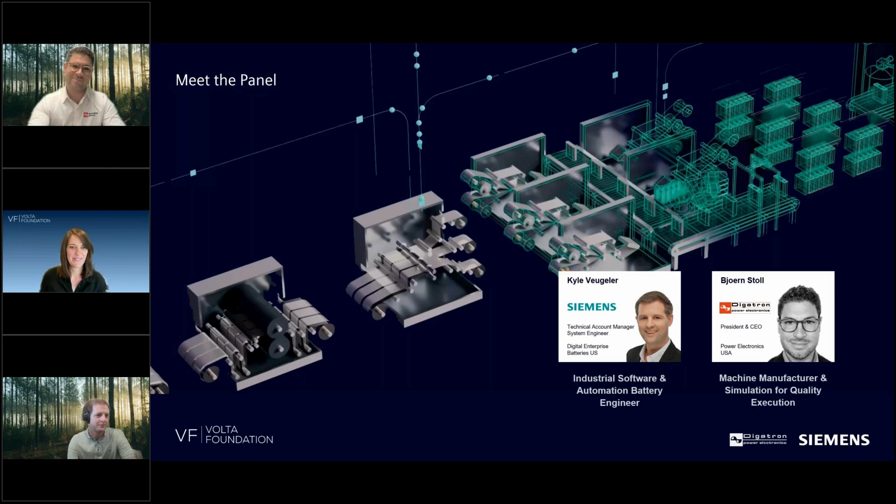Myra essentially came to us in both Digatron and Siemens and wanted to put something forward to the industry in terms of digital twin, some of the R&D design decisions that are coming out of lab environments, universities, academia, but how are we taking some of those findings using digital twin to actually go through that Death Valley gap of going into production, into basically turning a coin cell into an actual cell for production for people to use within industry.

Some of the key takeaways that we've identified, both myself and Bjorn, were what can we do to use some of these tools, or the questions people are asking for accelerating manufacturing ramp up, for the design and production synergy. I want to make a call out here in terms of some of those design decisions become exponential downstream to many different stakeholders. Thirdly, I would say the global partnership for production scaling, where Digatron's really going to speak

to what they do with manufacturers, tool builders, system integrators, looking for some of the solutions. And then also enhancing market readiness in terms of what we're using on those digital twin systems, how to improve, iterate, and better the next variant of those tools. Okay.

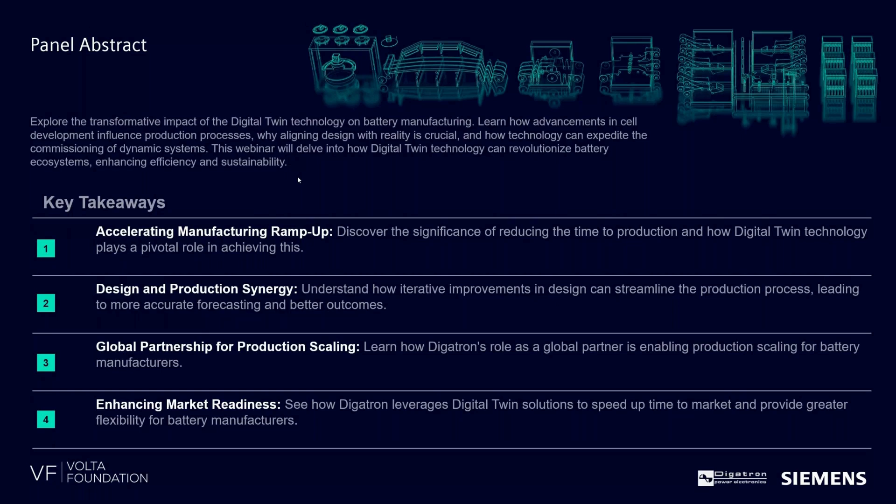So firstly, I want to explain my role within Siemens as a technical account manager. I tend to be a guide in some cases. Sometimes it feels like cheating. I've done a lot of these problems over and over and over again for the last 5 years at Tesla and others. But a lot of these customers are really starting to understand the value of digital twins.

And every battery manufacturer, tool builder, system integrator is at a different point in their life cycle of defining the problem, solving the problem, and then expanding that problem solution set. I want to give the industry at large here on the call today an idea of what I'm seeing, regardless of customer, form factor, chemistry, whatever that might be, what we're asking ourselves and how we're helping solve some of those solutions.

So firstly, a lot of the simulation of old from aerospace and automotive, it really becomes what are the limiting factors or front-end engineering simulation tools to define some of those key metrics. We do this in academia, we do that in research and development. We do this to define what is it we're trying to achieve on a simulation basis.

Also, the one that really has been a foothold of the last decade has been, how do I calculate my orchestrated operations? If I need to do 5 gigawatt or 10 gigawatt, how many tools do I need? Do they orchestrate well together? Is there a need for a buffer system? What's my consumption rate? That has been a simulation tool many years that we've been using within industry.

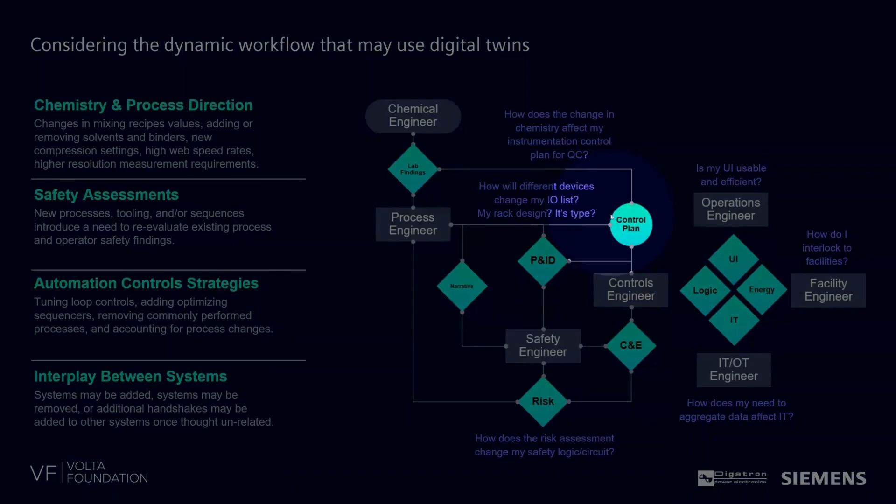I want to give an example of how that becomes a problem at scale. So say you're in the research and development team and you're looking to do something as simple as changing from NMC 811 to NMC 955. You're not going from NMC to LFP, you're not going from pouch to prismatic, you're not doing a vanadium battery change from a lithium ion, you're just changing the recipe within your dosing.

But downstream, you start to see drastic effects as it goes down to the different organizations, and it becomes exponential in nature. And I'll explain why the simulation tools and how they're interconnected help bridge that gap.

So in NMC world, you're going to change something like the amount of kgs of your binder, active materials. Those will have different physical properties, and they will have possibly different means by which you can measure bimodal distribution or compression or thickness of your electrode. Everything will change based on just changing something like this. And you're changing that for that reason, to actually have a better battery.

Now, what those teams in the R&D team are doing is they are trying to solve for these key quality gates, as it were. Like, we want to have a defined particle size or a different modal distribution or a viscosity or a granularity test for dispersion. They're defining based off this, those will change.

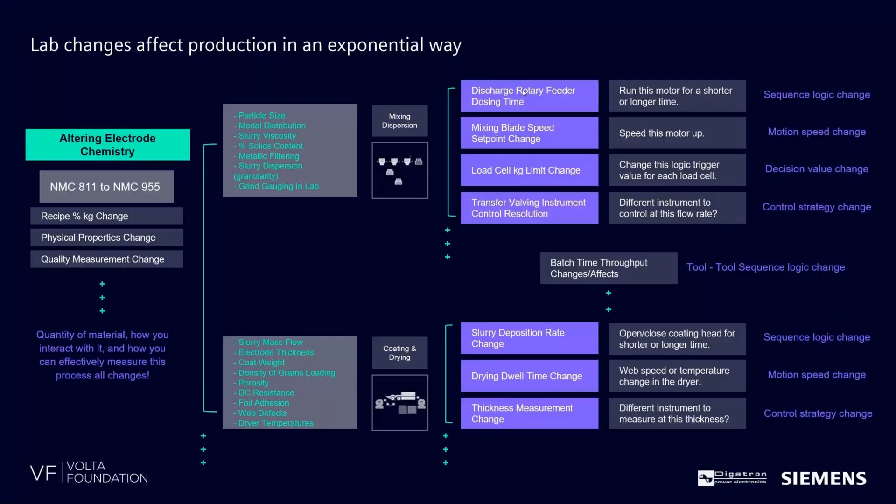The goal here, I hope the team starts to take away, is that a small decision, asterisk on small here, from NMC, just the dosing recipe or the chemistry, massively affects people downstream. Now, how do we tend to see this play out when it comes to industry?

There's three main hallmarks when you're tending to approach this problem. Your organization might not have the stomach to digest how big your appetite might be, but more or less this holds true. The beginning stages of defining what is your chemistry, what is your process, those teams are looking to solve for what are the key parameters for quality. What are the things that I need to attain in a coin cell that I need to take out of a lab into mass production?

The second wave tends to come with defining your process. Simulation tools here tend to be focused less on what are the key parameters to build, but more so how do I define the process by which I can do this at an industrial level, at scale, at a repeatable, resilient level. Within Siemens, we have aspects like CFD modeling or full-blown front-end engineering, multi-day, multi-hour simulation tools to define this, from atomic all the way up to CFD modeling.

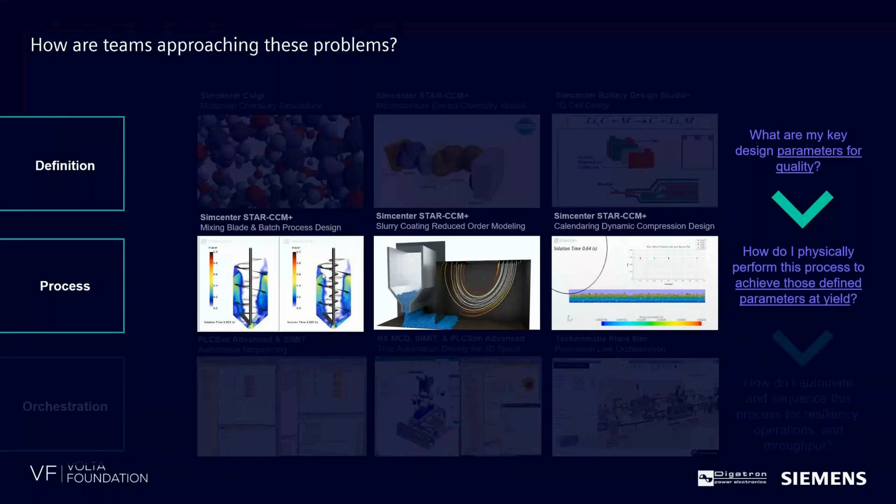Now, this is an art form, to say the least, but what we're starting to see in battery today is the tie points of that front-end engineering into the actual automation and how we can play with that interlock system.

We're seeing a mass adoption here in terms of simulating the automation and the manufacturing tools together. So when it comes to orchestration, you may want to simulate something like the PLC to validate the startup or shutdown sequence, a safety event, an e-stop event. This becomes far more important when it comes to battery and some of these continuous processes.

The analogy or use case I tend to show people: when we design safety for these tools, let's say it's a compression system, and I have a large calender. When you have an e-stop programmed into that system, A, they take hours to start up and shut down, but B, the e-stop is meant to protect your operators, or possibly the process in that case. There may be a hidden ramification for that e-stop.

Say you hit that e-stop, yes, you protect an operator from being crushed, pinched, whatever that might be, but it might come with a $100,000 price tag to resurface your calender facing over in Switzerland, or something to that effect. Being able to simulate, A, how does this tool individually, startup, shutdown, safety, how does it work itself together is important. But especially when you go to the gigafactory scale, how does my mixer dose into my compression system?

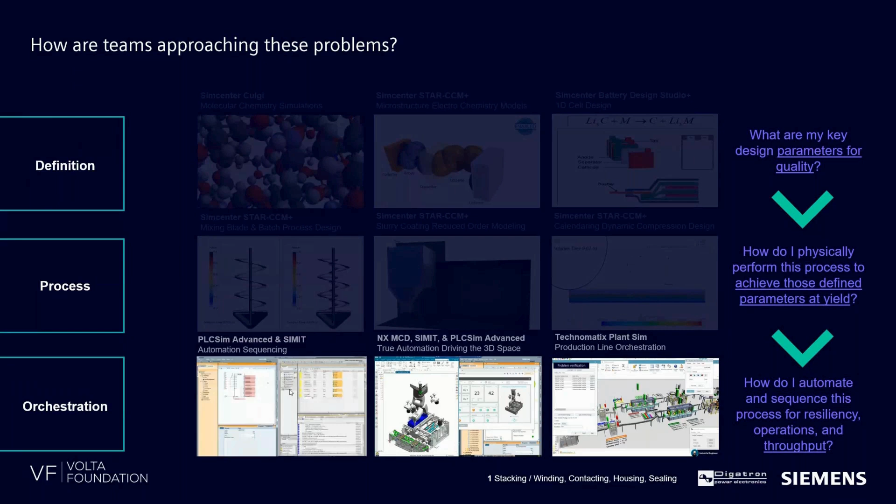How do my compression system and my coating system feed into my slitters? When I have these different tools, how do I work them together? This is what we're starting to see a lot of adoption in the industry in terms of validating this today. Hallmark here, like I said, there's front-end simulation tools for defining what your quality is and how you build your cell. 2 is the process by which you do that at a scale. And 3 is defining what your throughput is and how does it all work together.

So you're looking at quality first and foremost. Second, yield. If you're going to be selling batteries and you have 10% yield, you're going to go out of business. 3, throughput. You're a battery company. You might as well have a good throughput in terms of producing cells that you're looking to achieve.

Now, I want to give an example of some of this proactive validation that we're seeing across the battery side of things. This is an example of tying those simulations from a top-down approach towards the production line. So in this case, this is showing that play and how they somewhat overlap and can feed back into each other to characterize maybe I need a twin blade mixer, or maybe I need a different 40-ton compression on this electrode film because I have a different ratio up here.

In this case, you might change your recipe. You might have a higher compression percentage that's required. You need to validate if I add Si, or silicon, if I want to go down this road altering the more modern anode side of things, getting into material properties like Young's modulus and looking at thermal conductivity. This tends to live in this world up here. But you're still solving for something that these need to achieve.

So if you take nothing away from today, there are many different digital twins and simulations available to you. Not everything is one size fits all, because you do need massive data modeling to do atomic structure simulation, where you don't need to do that for other applications. But those key parameters that you're defining up here are what this is achieving. So this is where we link them all together at Siemens today. You're analyzing, you're finding these parameters. This is that Goldilocks zone of this team interfacing with the other teams.

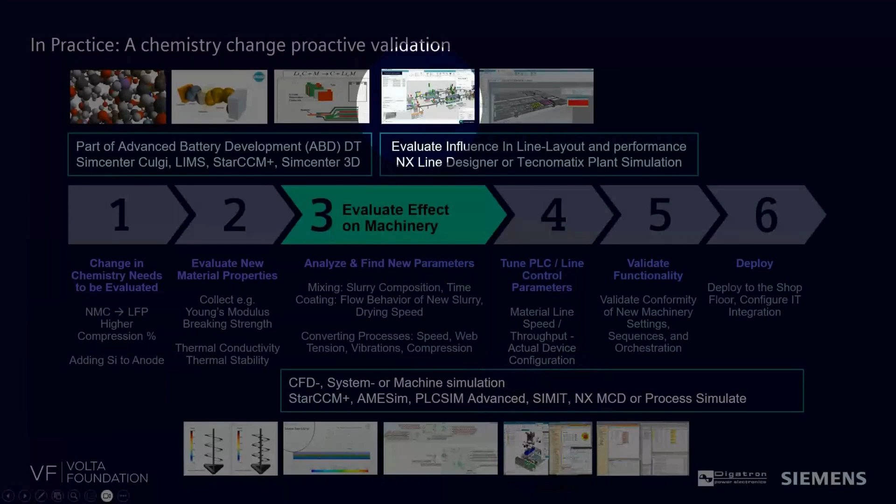Now I want to give you two, we'll call it thought practices in terms of how I'm seeing this play out as well. The first one is a top-down simulation approach. This is more of an early days critical path. I have Sequoia funding. I need to get C-Series out the door. I need to start getting some ROI on my business. Those organizations have a really good understanding of what it is they're trying to achieve for the parameters set.

That's great. In most cases, you're starting to see, I have an idea of what my line needs to be, how I should size it, how many lines, but they're black boxes. And then they look out to tooling suppliers to say, hey, solve this one box of the 20 boxes according to my parameters. And then as that process plays out, you start to understand, I have no idea maybe how that machine works at the fine-tune level. I have a general idea of this tool.

I have a really good understanding because maybe I have a novel process on how I coat or how I do a certain process in the system. But you're starting to get a general idea of how those work together. And this is really where the problem of simulation tends not to take too much of a hold here. The modern advancements of the last 4 years of our communication speed and compute capability allow us to go to this bottom-up approach as well.

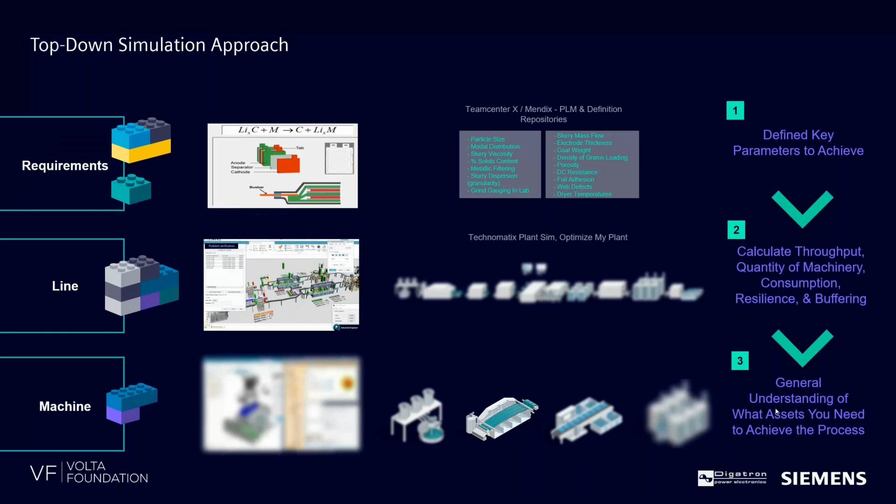So you can still start with the top-down, rough it all out into these different chunks that you can solve and move forward with. But now that we have the ability to take the PLC data and the actual automation quality parameters, we can start to push that back up into that production line model instead of, I have an 80 meter a minute metric for my coating line. No, I want to tell you the exact speed ported from the servo drive on my coating roller journal, my main drive line. We're bringing those into the line simulation to say, sure, you can simulate it. We can now take it and characterize that based on real world characterizations and observations.

And what you're starting to see is you can actually go through and figure out bandwidths or phases or gates that you can see on the different particle sizes. If I go past this threshold, I really need to radically change my production line or my manufacturing tooling provider because of this. That is incredibly important for the team to hopefully take away here.

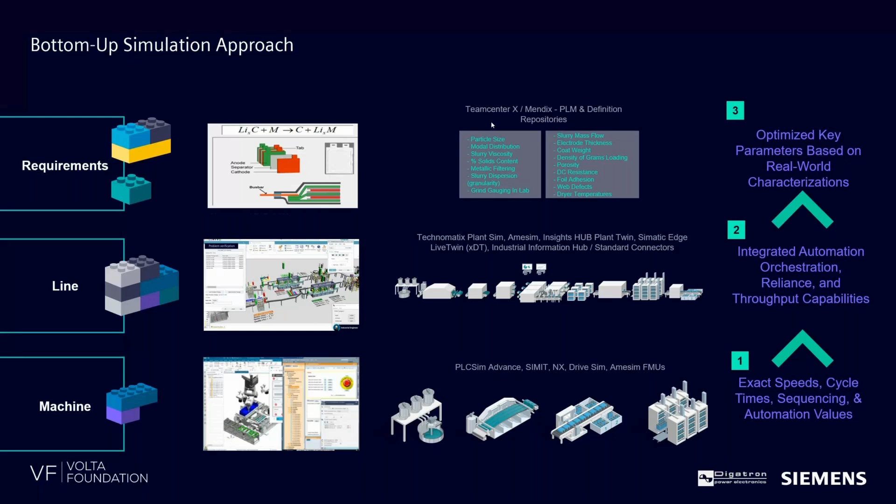This here is kind of an overview of what I depicted earlier. It's really more an aspect of, I want to make sure people understand there's definitely a time and a place to understand what is my simulation in the early days for understanding the atomic structure of my cell, maybe a smaller market, more niche. There is an OEM tool builder system integrator suite in terms of understanding how should I design this specific tool or optimize it or iterate upon that.

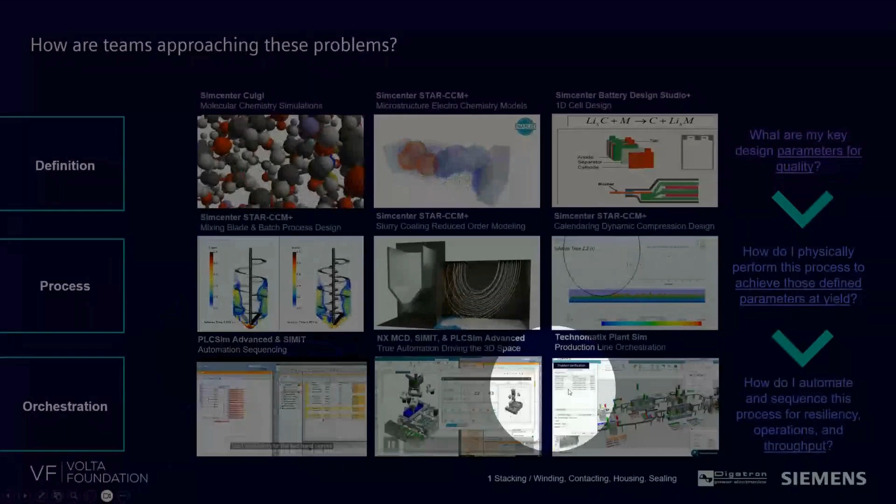And then also lastly, there is a massive push for creating digital twins to validate sequences. Me personally, I did not want to go do a factory acceptance test over in Korea or over in Switzerland, wherever that might be. If I can virtually take a look at this program, validate it is correct for what I need, I'm not going to go over to a supplier, yell at them for color codes and naming conventions on the automation. I'm going to use my time well.

Second to that, operations for battery. All of you are very familiar with this. We tend not to want to start and shut down these production lines. So training your operator and your workforce in a virtual environment that doesn't have a ramification for an e-stop or a plugging of a loss-in-weight feeder, wherever that might be, really de-risks your operations and training and your iterative design for the future.

Lastly, what I'll say with this is more of a US topic. I'm seeing a lot of manufacturers. Maybe you're a tool builder and you source to Georgia Pacific in the converting industry, or you do food and beverage boxing like a Tetra Pak or others. They know web handling and coating quite well, honestly. They're looking to say, hey, what if I just throw electrode into this instead of pulp and paper?

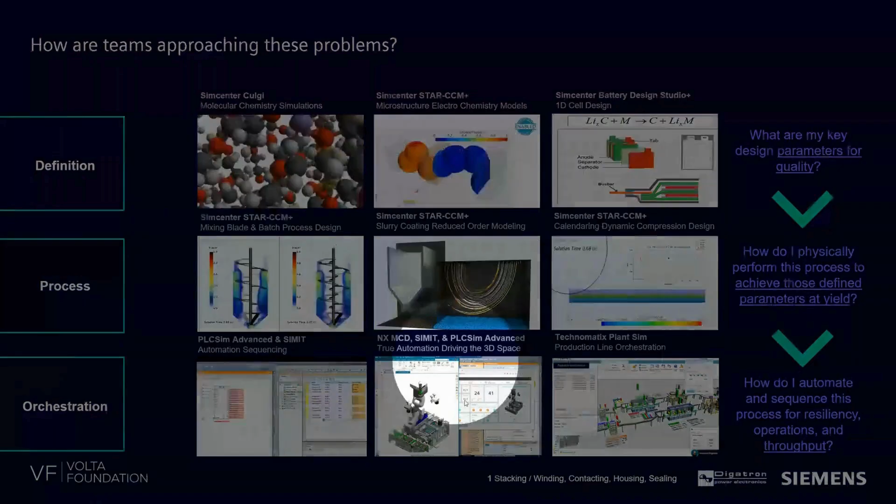The digital twin allows them to create their tool, validate some of those metrics in place of saying, I want to buy a $3 million CAPEX, build the tool, then figure out if I can do this and sell it to someone. This is one of the unlocking aspects of tool builders within the US today to say, can I move from that industry over? I don't want to bring lithium into my building.

I don't want to spend $9 million on a formation, aging, and test structure and float $9 million for a year long. I want to create this, show it to my potential customers, and I've already done 30-40% of the design work for when they give me a PO to move forward with this. So it's really helping deleverage industry adoption into battery as well, which has been really helpful in the US.

Okay. Aside from that, I wanted to paint the ecosystem as I'm seeing it across manufacturers, OEM tool builders, and system integrators. Now that we can understand at least the ecosystem of what people are asking and the take rate for things, I really want to hand this off to Bjorn, who can speak to what they've been doing at Digatron in terms of the tool design and using some of the digital twin aspects.

Bjorn, it's all you. Thank you very much, Kyle, for handing it over to me. As we discussed at the beginning when we prepared our presentation, my focus in my previous role was using Industry 4.0, IoT, Internet of Things, digital twins more on how we can increase productivity. This has changed after not only our conversation, but also in the market, talking to our customers. And the major topic and the major focus is safety, risk management, and quality.

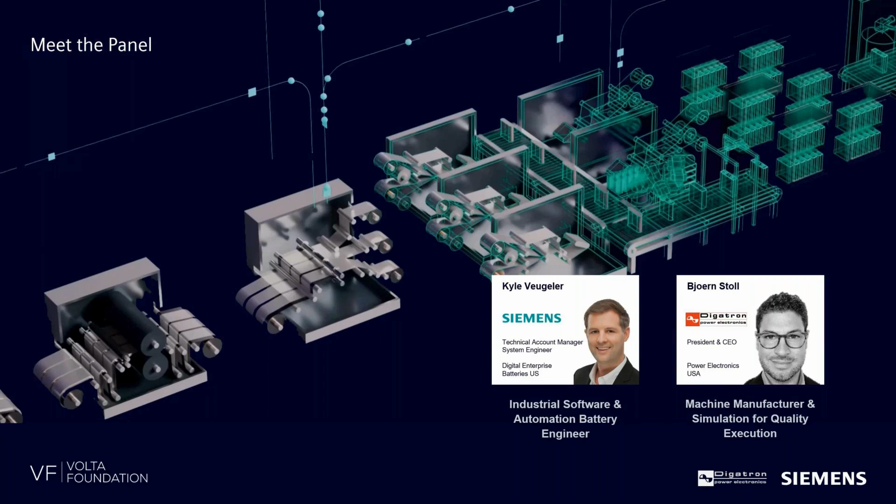Risk management on the financial side, on the downtime side, and that includes also what you have presented on the change side. But as a manufacturer of machines, we are focusing on the development side before we are building the machines. So if you go to the next slide, please, we have an example of how we are doing it at Digatron. For example, over here on a pouch cell. So we are starting the dry side. That means that we're starting on the anode and cathode cutting side.

Previous topics which Kyle presented, mixing, changing chemistry, are impacting us later on. And that's the reason why a digital twin can help us in the entire planning phase where we need to focus on safety, quality, and risk management. Hence, we are starting with single station units on cutting, and then we go through the entire process flow. This is only for pouch. We have the same for prismatic and for cylindrical cells.

And while we are having single station units for every process step, it helps us and the customer to really see in the development phase where they need to have automation, where they need to increase their safety aspects, where they need to change something before they're making the investment. And that's the reason why I'm talking about risk management from the beginning, to avoid investments which they are later not able to use or need to change when the customer has installed the units in the factory or in the development lab.

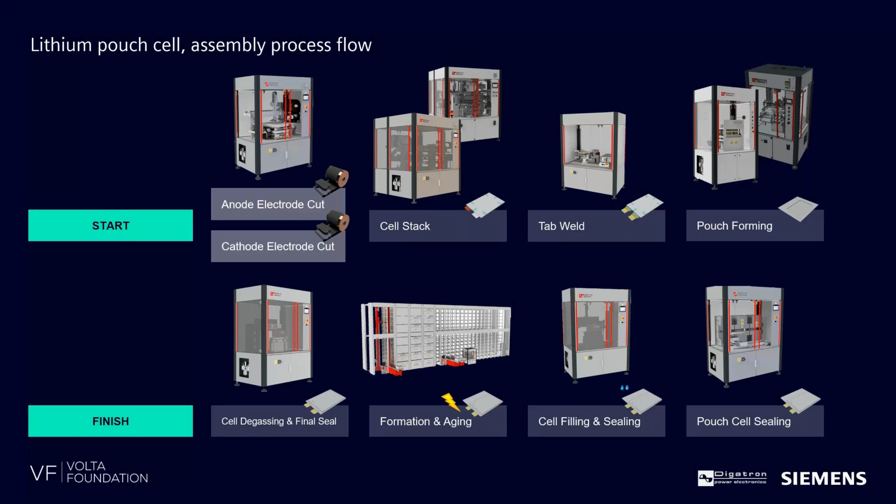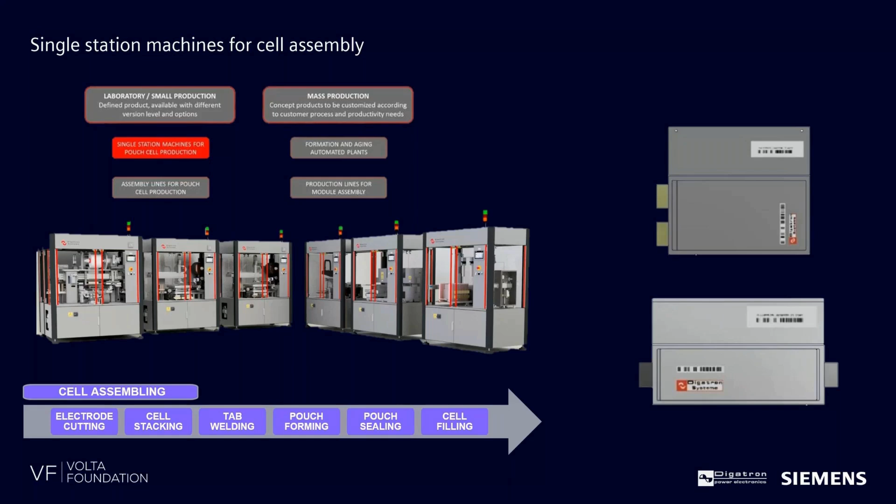So hence, we are going to the next slide, please, Kyle. We have the single station units on the lab side. Later on, we are going into mass production, and that's the reason why the digital twin can also increase the amount of cells you're producing every day. So you can scale it up, and you can see where in the process an automation makes sense, where you need to have quality inspection in place in the process, as well as where you need to increase the amount of machines to achieve your manufacturing output and quality you have promised to your end customer.

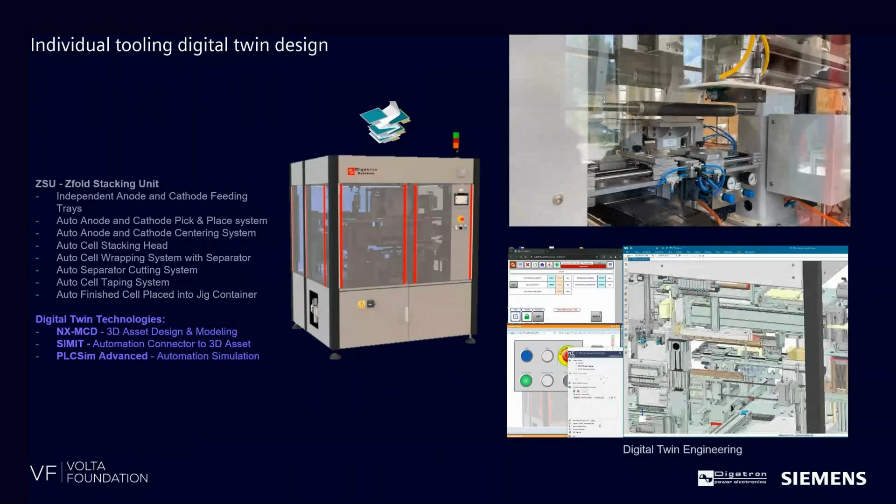So for example, we have over here a Z-folding stacking unit where we have a digital twin on the right side below, where we started to simulate the entire Z-folding process above. So you can see below the digital twin is showcasing exactly what the machine at the end is doing when we have installed it at the customer side. And we are using the simulation for all machines along the entire process flow, which I have shown in the slides before. And we are analyzing where we need to increase speed or reduce speed, to have the quality parameters fulfilled for each and every process step.

Kyle, would you like to go to the next slide? Perfect. And talking about later on, while we have a single station unit for each and every process step, we can increase our capacities accordingly and optimize it when we have the digital twin along the entire value stream. Hence, we are using the machines and putting them all together and doing the automation according to the customer's requirements, where they don't like to have manual handling. We're doing an automation and a conveyor belt handling.

Once we have perfect, keep it as it is.

Once we have manufactured our cells, we want to evaluate the cells. That means not only for incoming cells when we have the cell manufacturing process outsourced, but also when we're producing cells, before we go to the formation.

On the left side, you can see a conventional impedance point, one resistance point at one kilohertz. With our system, which we are installing, you can click on the right, Kyle, please. We can show 32 impedance points per second. This helps us to really evaluate the cells and predict the lifetime of the individual cell before we put them into a module and later into the pack.

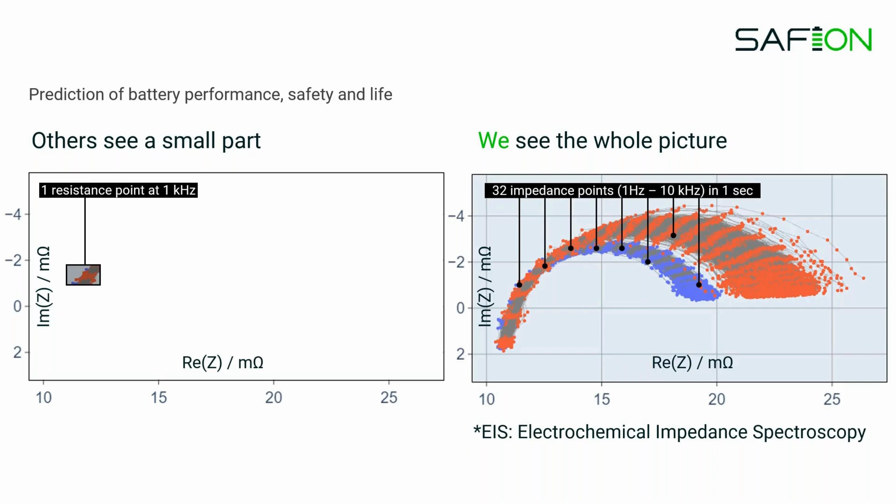When we go to the next slide, Kyle, you can see an example of the same cells coming from the same batch, but each and every cell has different quality parameters. Hence, with a digital twin, we are defining the ideal quality level of the cells we want to produce, and later on we can measure it against the reality.

On the left side, batch 1 has a longer lifetime and batch 2 has a shorter lifetime. Hence, we can do the cell grading, putting the batch 2 cells in a module and avoiding mixing them with batch 1 good or optimum cells, which would make the module and the pack weak at the end. On the right side, we can see the instant battery lifetime prediction. This runs against the model which we have created in the digital twin, which runs against the reality.

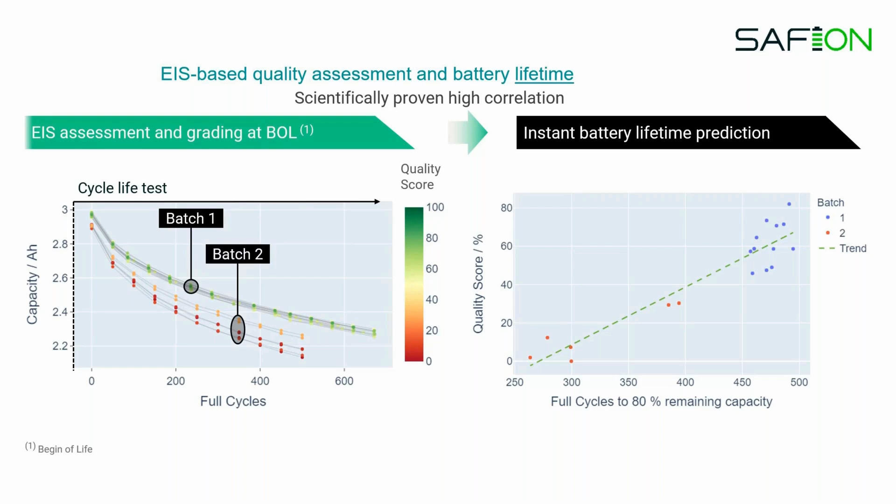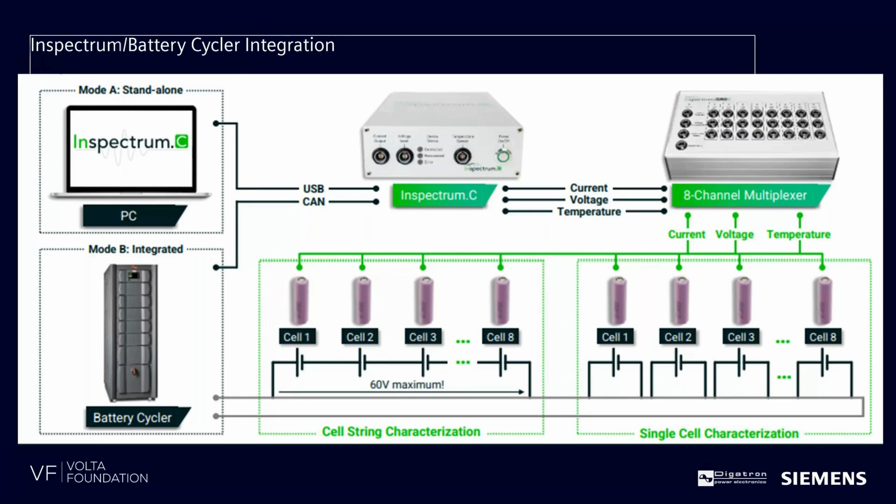These process steps make it possible to do the cell characterization of a single cell, or a string characterization where we put multiple cells into our system. While we are doing the electrochemical impedance spectroscopy, we are measuring current, voltage, temperature, and cycling the individual cell through the required formation process and/or for a lifetime prediction of the individual cell.

Coming back to the digital twin, what we are doing with the digital twin is showcasing the entire process flow. Can you go back, please? One back.

Thank you. What we are doing here, as a turnkey solution, is showcasing the entire process flow. Important for us is to showcase not only the process flow, but also the modularity of the system. When we're talking about a gigafactory, we're starting with half a gig. And how does it look when we increase it later to 4 gigawatt, to 8 gigawatt? What do we need to do when it comes to firefighting strategies, ASRS systems, and tray conveyance, as well as the formation process and the aging process?

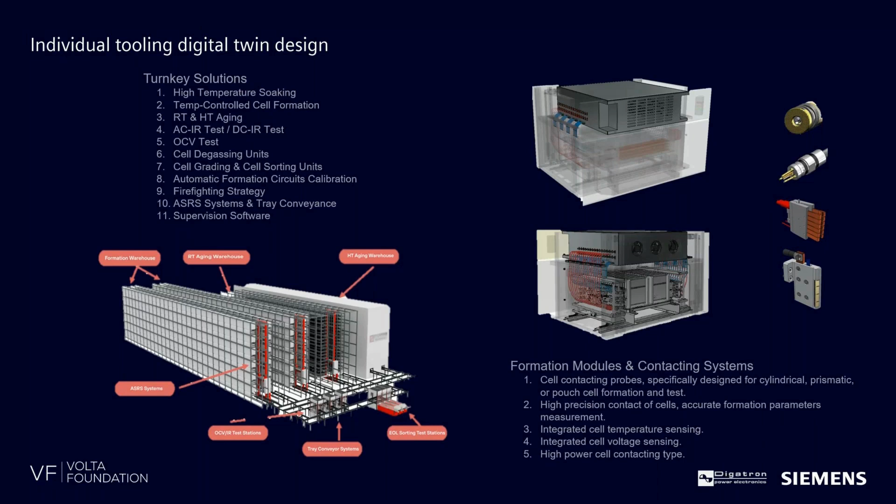Perfect, Kyle. Thank you. Can you go to the next slide? Here is an example, and I'm not sure, Kyle, if this is a video as well.

We have used the digital twin design to design a warehouse, to design the formation process, to define the entire material movement between the individual steps before and after the formation and aging. Kyle, would you like to explain how we have done it?

Yeah. So circling back to what I was talking about earlier in terms of this building block approach, going from the bottom up, what Digatron has been doing so far is we're simulating the PLC. Then we're simulating how the PLC actually moves mechatronics on that side of things. That was the single cell station that we looked at earlier. And then when you start to scale, you're using those same assets, but it's pulled from actual automation, actual characterized events from production, so that when you start to get to this throughput line design aspect of, okay, where are my bottlenecks? Do I need to add more pallets to the line or remove them?

Do I need buffers? Or one recently was my anode and cathode coating line. My cathode is 3.1 meters and my anode mother roll is 2 meters. So even though they run at 80 meters a minute, you need a buffer on the one because the cycle time is going to be different. This is where you start to see those building blocks start to work together on the bottom-up approach.

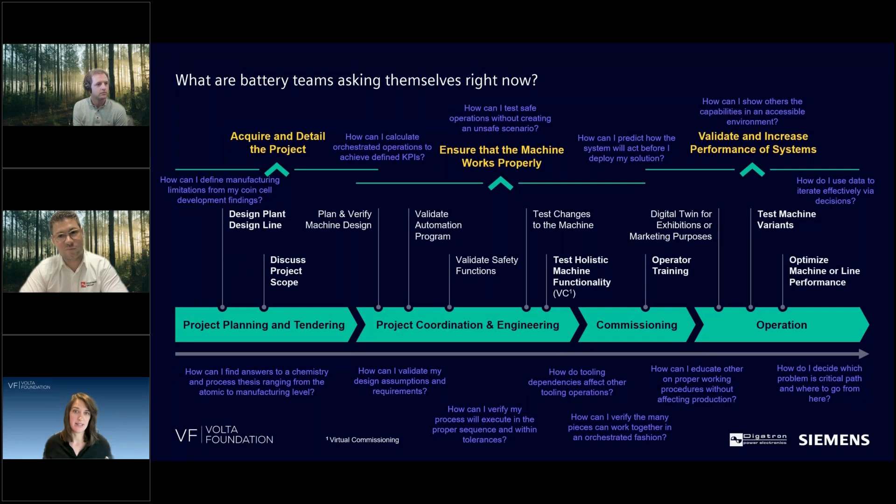Yeah, I'll take that one, Bjorn. This image here, I think, is a good depiction of that. So, like I mentioned earlier, you might change your chemistry. Therefore, you might have more metal in that composition when you're mixing or whatever that might be. That's going to change how your slurry, or if you're doing a dry process, how your compression is going to be forced on more metal to compress. So you might go from 10 tons of force to 40 tons of force. That changes how we program motors, how we program instruments. Can we even measure at that thickness of what you're trying to achieve? That starts to be the downstream effect.

So we can simulate in the front end engineering what should be my new compression force. We can go into our automation in our 3D environment and say, can I even achieve that? Can I turn the motor up high enough? Can I even get there? Where are my limiting factors there? And you can pre-validate that in some cases.

And plus, obviously, changing the chemistry is having an impact when you're producing the cells, and also when you're doing the formation of the individual cells, because the formation profile will change or may change, and the formation process takes longer.

Okay. Thank you. And then, did you guys touch on... so it's having an impact. You walked through. So specifically to line speed, are we able to comment specifics on line speed? Yeah, I'm not sure. Yeah. I'll take a non-NDA IP tied answer to this one as best I can.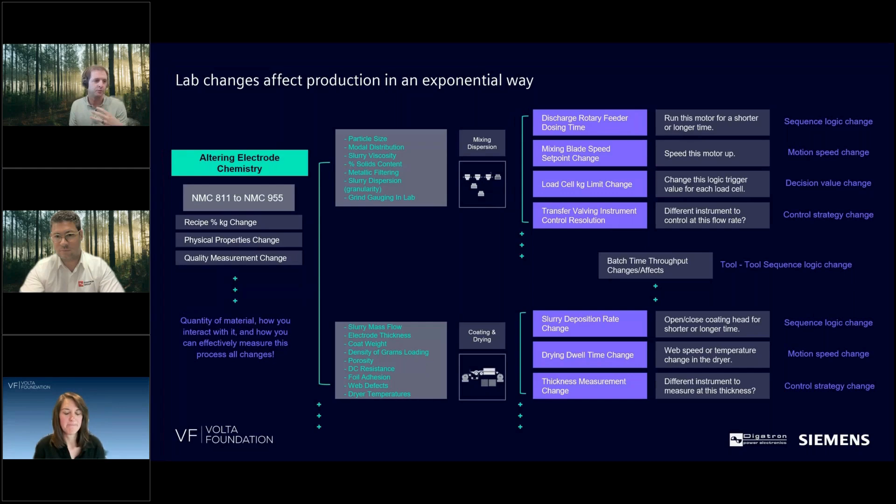So if you speed it up, that shear event becomes more likely. So in the simulation, you can say, if I speed this up, does my deposition on coating need to change to accommodate for this? Or if I speed up, can my pressure even attain what I need to without shearing the web, or something to that effect? Okay.

Thank you. I think that was a perfect segue into the next group of questions, Kyle. You read my mind. That was good. And for those that asked around chemistry impact specifically around line speeds, please follow up with Kyle and Bjorn, and then they can chat more in detail if you have something specific in mind.

The next group of questions is around digital twin simulation versus being able to predict catastrophic failures. This is close to my heart as a former expert witness with Exponent. Let me just read one of these questions specifically, but there's a group kind of around here. How can catastrophic failures, cell failures, be simulated? And is there a way to predict the unpredictable? That's a tough question. Yeah. Bjorn, do you want to go first, or do you want me to go?

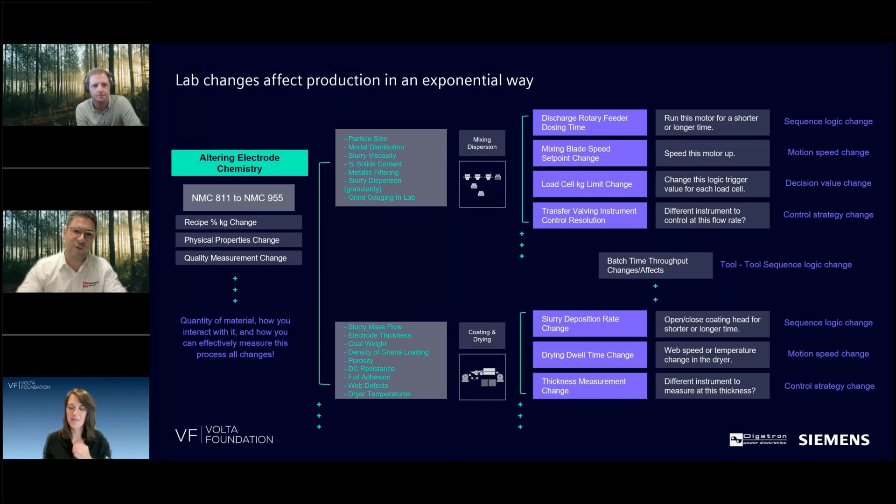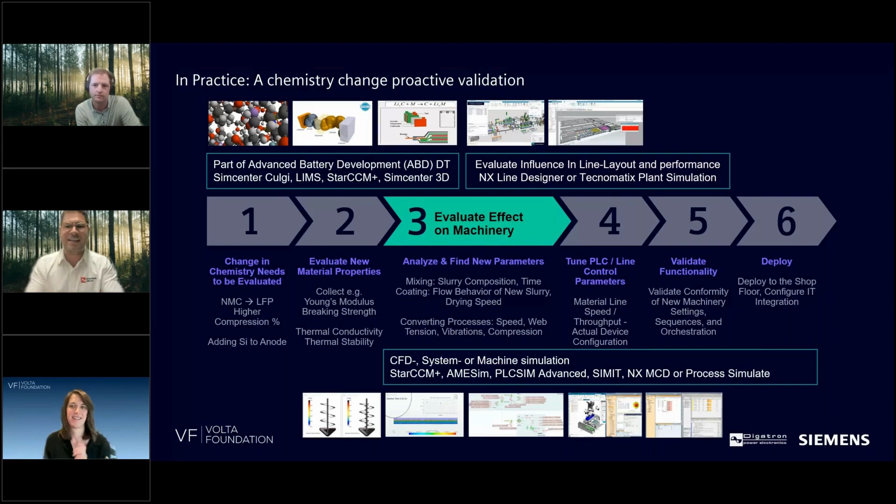Yeah, I mean, just one comment, because it's the big advantage, and I have seen another question which I liked: how can you put different machine manufacturers' equipment into the digital twin? This is an important factor, because if you have just one manufacturer in line, you can't predict, and that's the reason why it is so important in our point of view to have really turnkey solutions and work with other companies together to really work on safety.

And safety is the most important factor in the entire manufacturing process, because if there is a fire or people are dying because of any kind of event which would have been possible to protect against if you planned it in a proper way, I would say including the entire value stream in this digital twin makes sense to at least foresee some catastrophic events. Just my comment before Kyle's explanation on how to do it now. Yeah. So catastrophic is a bit nebulous, right?

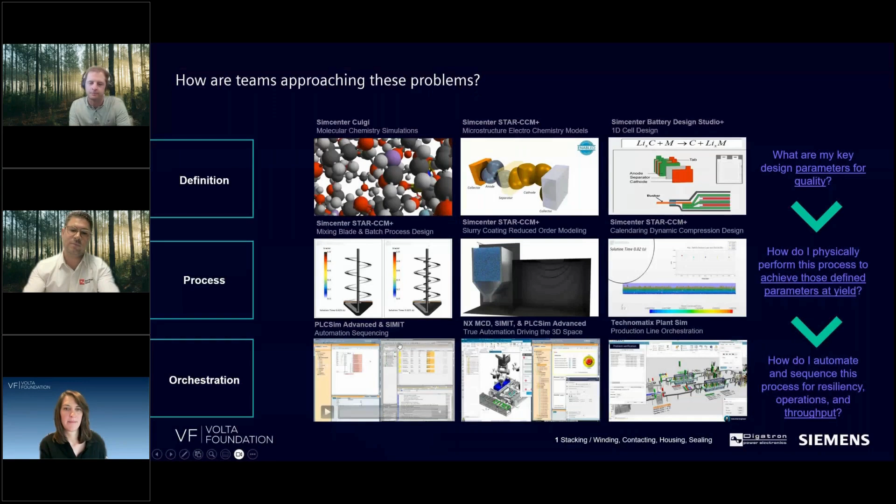But yeah, when it comes to this, what I will say is, in terms of the actual automation simulation, I'm seeing a big uptick on this being part of that conversation. So what do I mean by that? A startup and shutdown sequence is very coordinated for your production line. Say you lose a connection to an abatement system, let's say an NMP scrubber on a coater, you cannot run that coater. If something fails on that, you do not want NMP in that building.

In formation, if you're simulating that process and you want to just check, hey, what happens if I lose connection to fire suppression? How does that affect my production line? Or if I have a thermal runaway event, how can I simulate that in terms of like a mass flow calculation and CFD modeling? That's a very advanced version of this example.

Or it could be as simple as, I want to spin my blades at 1800 RPM. Can they do that under that strength tolerance, or am I going to shoot a blade through a wall here? Validating some of those catastrophic simulations where, no, you do not want to do that on the production floor doing DOE trials.

Yeah, that makes a lot of sense. And I think, Bjorn, I liked that you pulled in a couple of the other questions asked from the audience. This comes back to the full battery ecosystem, right? It's not just one piece of equipment; it's everything, and bringing that together where it is different equipment manufacturers. So that's a really good overview. Thank you both.

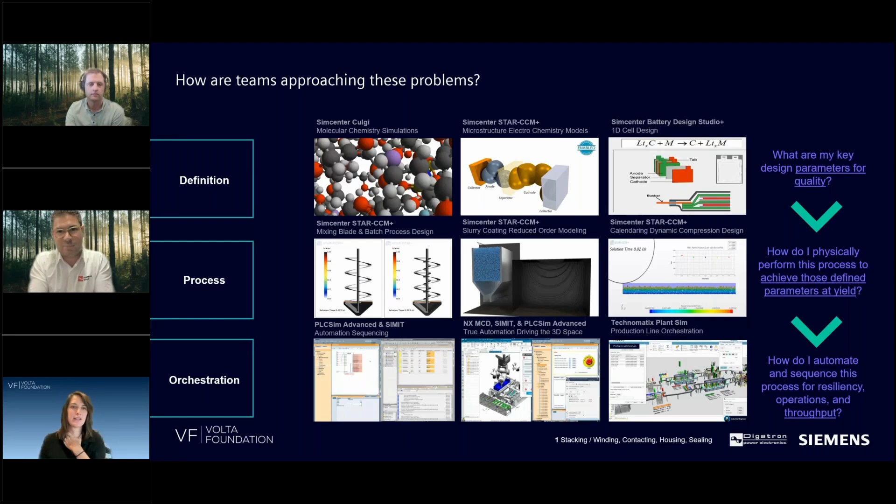I would like to say, having the battery passport maybe at the end for every battery type, because you have all the data in the process, and then you can combine it and have really the entire process from raw material up to a formed and aged cell, which goes later on into the module and pack, to see where in the process we had some quality related problems before we're having later on a fire in a car, or in a scooter, or wherever the battery is getting installed.

There's a question about battery passport, so that's really great. How can a digital twin tie into the battery passport and ensure traceability throughout the life cycle? So I think you just touched on that. Yeah, I would say this is exactly where we need this.

I think this helps to see where we have a gap to have the full traceability in the process, and where we need to close the gap, and therefore having the PLCs speaking with each other, and having this in a system above, or in an MES system where you can backtrack the entire manufacturing process and the raw material supply chain for the individual cells. So you can really see where we need to close the gap, and where as a customer I need to take care when I'm writing my RFQs for all the machine builders to produce a battery cell, module and pack.